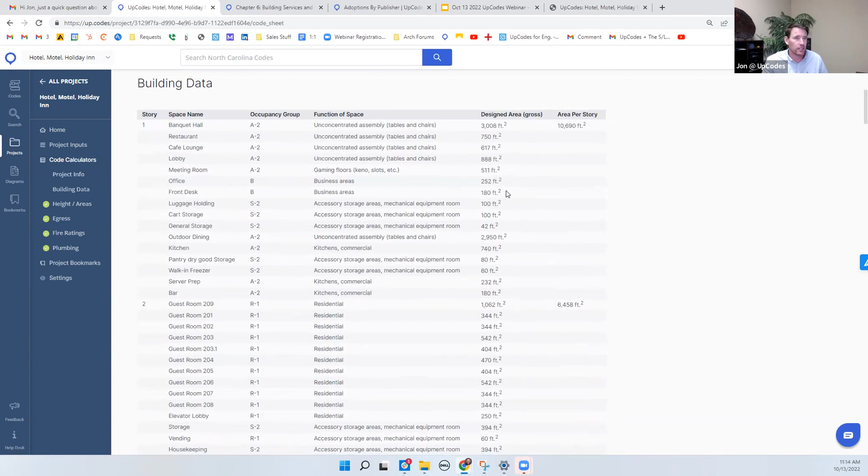Same idea here. I'm going to enter in information about my building, occupancy group, function of space, designed area, how many stories, sprinkler type of construction, whether or not I have fire separated occupancies. And based on that information that I punch in, the calculator is going to tell me whether or not my project is compliant.

So here I can see all my different, I've got a non-separated mixed occupancy here, so I've got one allowable area for each of my stories for all my different occupancy groups. And each time we do a calculation, we're going to walk you through the logic of the code we use to arrive at our conclusions.

So the first question will be, is this an unlimited area exemption building? No, looks like it doesn't meet the criteria. But if I want to check it out, here's those sections right there, and I could get a refresher on whether or not it's an unlimited area building.

Did we qualify for an area factor increase due to frontage? Well, we have 25% of the perimeter on the public way. So we'll go ahead and calculate the perimeter, the qualifying perimeter, based on distance to right-of-way lot lines. We'll get our equation here to get our factor increase, and then we'll increase the tabular area accordingly.

Again, each step along the way we're linking you to those sections of code saying, all right, here's the equation we use to get there. You know, maybe I want to bookmark it, say, all right, I use this to make sure I increased my area. Now it's added to my project.

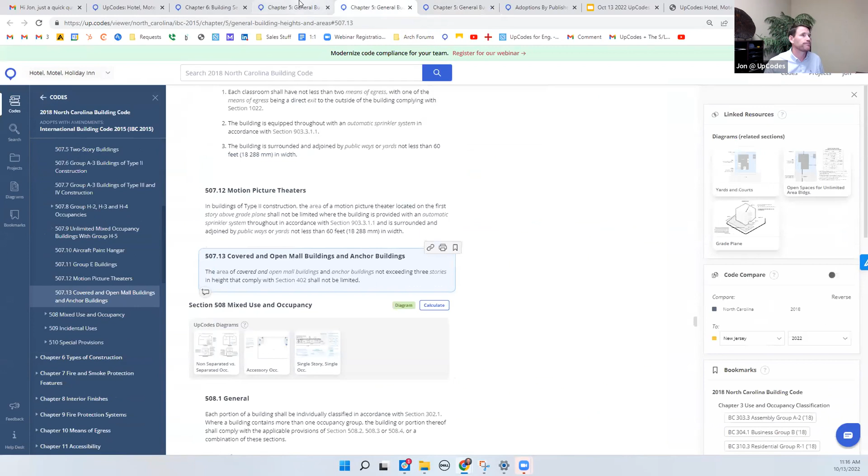So we'll go through and I can see, all right, my allowable area must be greater than or equal to the total designed area. Perfect. All right, I'm compliant.

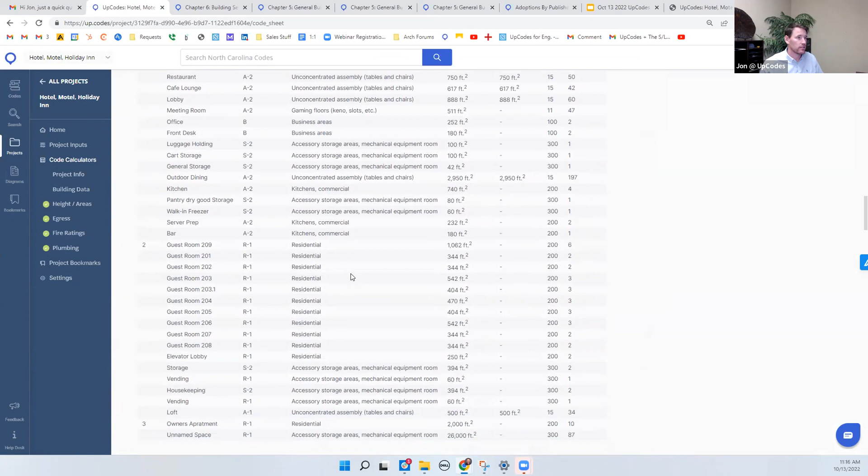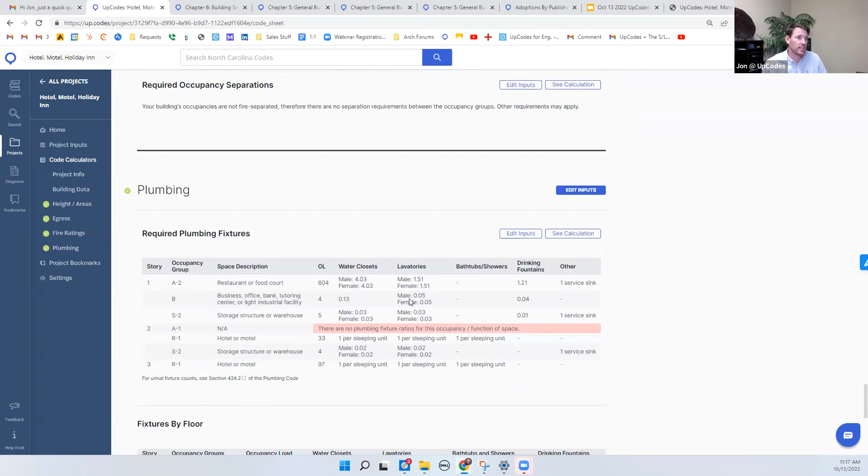So we'll go through these calculations in a very similar fashion for key areas here: building area, building height in feet, height in stories, egress and occupant loads. We'll calculate those occupant loads for you automatically based on occupancy, function of space, designed area. How many exits do we have per story? What's the travel distance, dead end corridor length? Fire ratings, area separations, corridor resistance ratings, and then what are our required plumbing fixture counts?

All these items can be exported now as a PDF or Excel. We'll go ahead and do Excel here. And now I've got a detailed code analysis sheet walking me through each step that we just did.

Now, if I share this Excel sheet with a building inspector, general contractor, anybody, all they have to do is click these links and it's going to take them onto the code, the free codes.

So now that I'm back in the code, I've got to do some additional research here. One thing I'll mention, since the codes are free and anybody can access them, each section of code here is individually hyperlinked.

So I can copy a link and maybe throw it in an email, responding to an RFI, giving clarifying code information. Anyone who clicks that link goes to UpCodes, sees the free codes. Sections that are referenced will pop up with definitions, and I can click links to reference sections and it'll take me right to those other items.

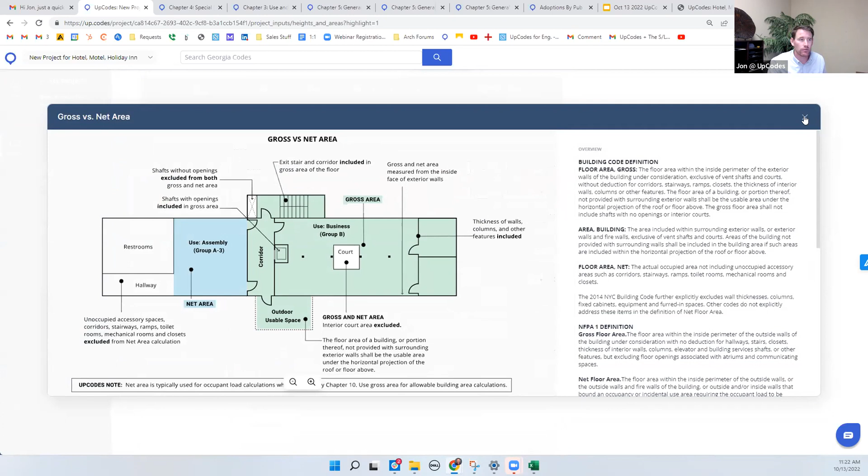I can go through, and once I enter in information about the building, maybe I want to change the construction type. Could we do a different sprinkler type? Is that available to us? Or maybe we do make it fire separated occupancies.

So this code calculator, as I'm translating into a new jurisdiction, is a great way to see — well, what if I change, what if I make these various amendments to my project? What are my code implications?

Now as I'm doing this research, obviously it's a pain to switch back and forth between different books or different spreadsheets and things like that.

One of the best parts and most widely utilized features on UpCodes Premium is the ability to search. So when I search a term, it's not really similar to Control F on a PDF — I'm not just doing a word search on one document.

I'm actually searching that term across every book in that jurisdiction. So all the codes we host, I'm now seeing all the hits — getting a lot of building code results, seeing results for this term in the fire code, sprinkler code, and the North Carolina electrical code.

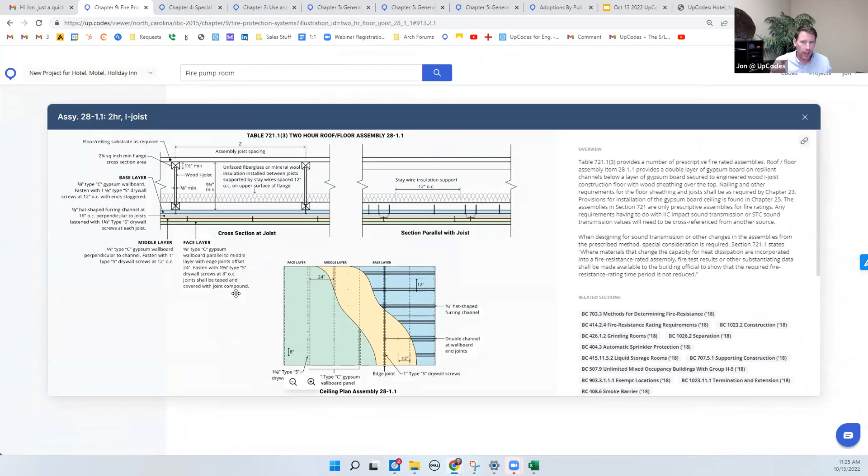So I've got my results here. I've got my fire pump room. I've got my answers to my questions. This particular section has some diagrams associated with it. If I click on one of these, and again, we saw these in the code calculator, helping us to understand what was required.

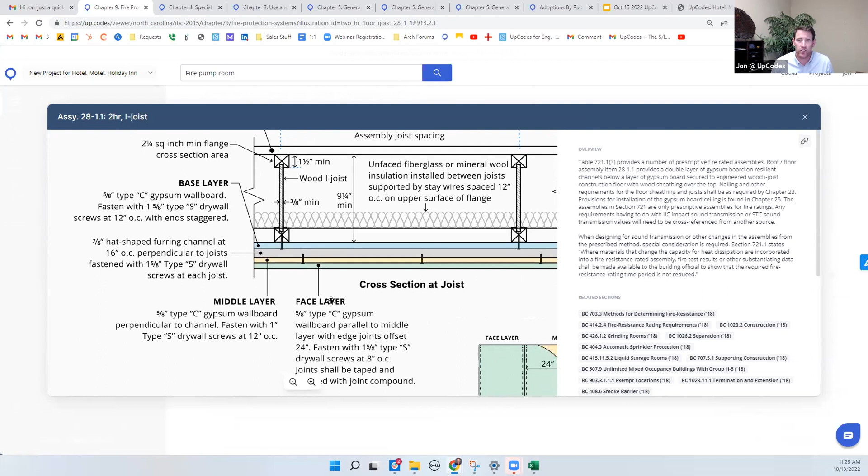Same idea here. What we've done is we've created a graphical display of what the code says in so many words, a visual unpacking of the codes. And we're not trying to make an interpretation of the code as much as just take the time to put the words of the code in an easy display, a visual.

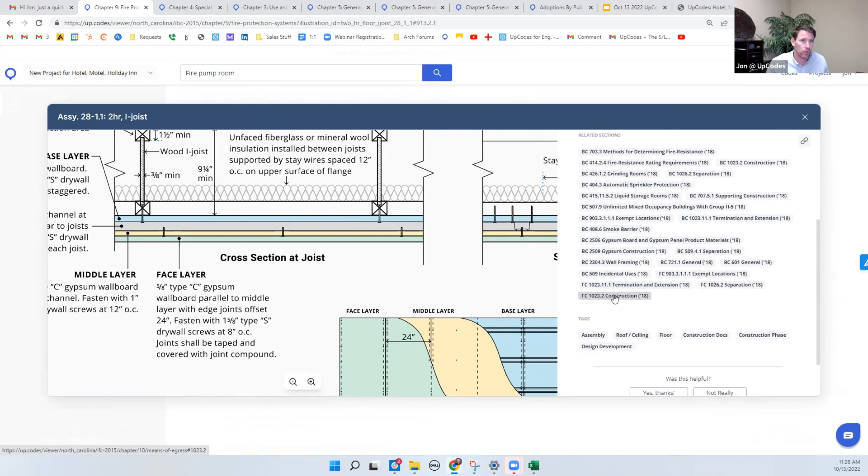This one's real nitty gritty. We were looking at a 2-hour roof floor assembly. I can see all the different components here. Got a plain English overview, and then links to other sections of code that talk about the same topic where this would be relevant. Again, I'm seeing sections here in the fire code, me following the tentacles of the code and getting deeper and deeper into the intention of the code and the rules of the jurisdiction.

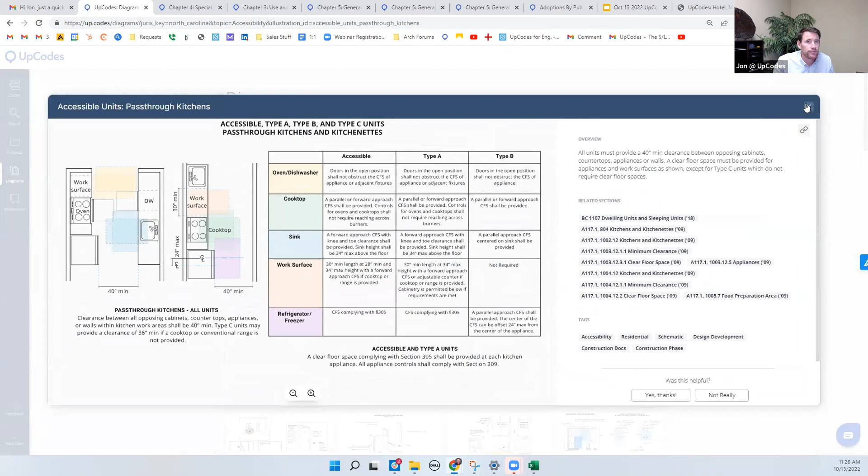We have about 700 of these. We're adding 20 to 30 a month. And you've got all sorts of different topics. I can say, well, let's just take a look at accessibility. All the way down to broad concepts like atriums, concrete steps.

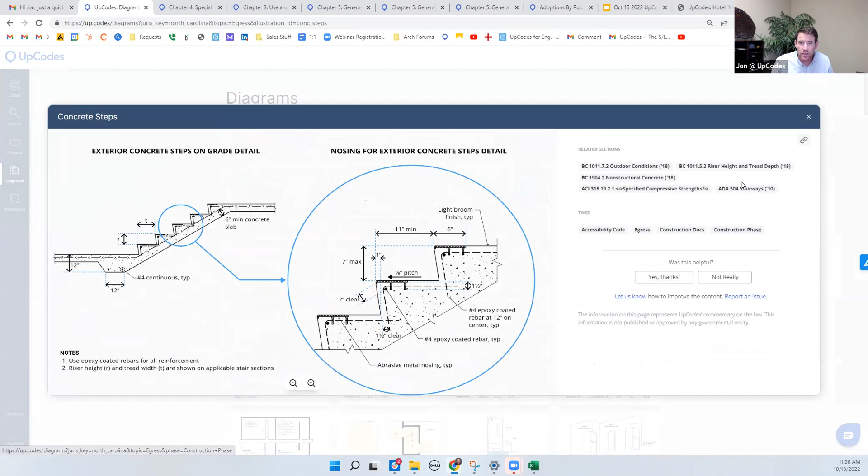Another thing that's great about these diagrams is that I can share them. So if I'm having a conversation with a building inspector and trying to make my case, or maybe I want to clarify something, I can post these directly into an email or document of some sort, and now I can share it. In fact, we got a report the other day, I'm sure this happens pretty regularly, folks answering an RFI using these diagrams. Hey, this is what I intended. Take a look at this image.

All right, we'll go back into the codes here. One of the things I can do with the codes, as I'm working in different jurisdictions and I want to understand what's changed, what changes when I go from North Carolina to South Carolina, is I can compare the codes side by side.

And what we'll do is we'll highlight for you anything that is different. So as I'm doing that project, moving items from North Carolina all the way down to Georgia for a similar project, it's going to highlight for me, well, these are the differences you need to keep an eye out for.

We can also do this within the same jurisdiction. So Connecticut, South Carolina, soon Massachusetts, New York City, California, all these jurisdictions that are updating their code, I can take a look at one version to the next. What's changed across this timeline?

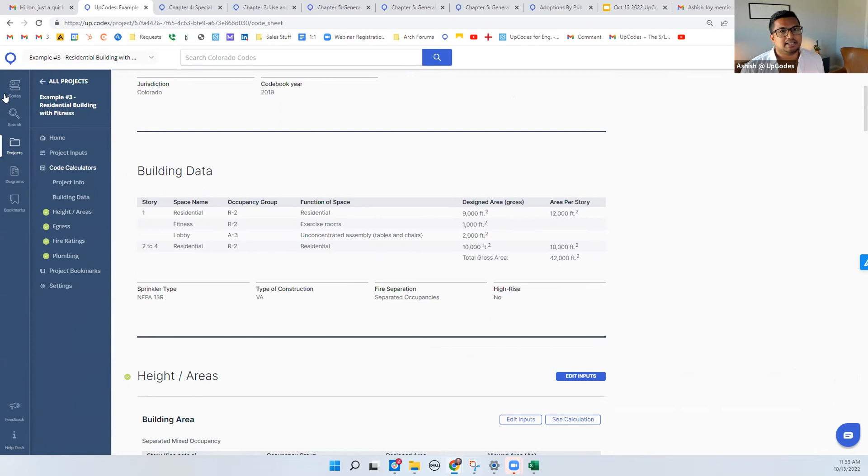Good question. Awesome. One of the questions that came in, I think would be relevant for the group is, could you just walk through a little bit more about code compare and the amendment styling, kind of show that feature and what the capabilities are?

Yeah, definitely. So I'm going to go into a jurisdiction here. We'll go into Connecticut, and I'm picking Connecticut because they just updated their code.

And we'll go Connecticut to Connecticut. So, working as an architect in Connecticut, I have a pretty firm understanding of the code that has been, but now that we have this new code adoption, what's going to be changed? What's required of me now?

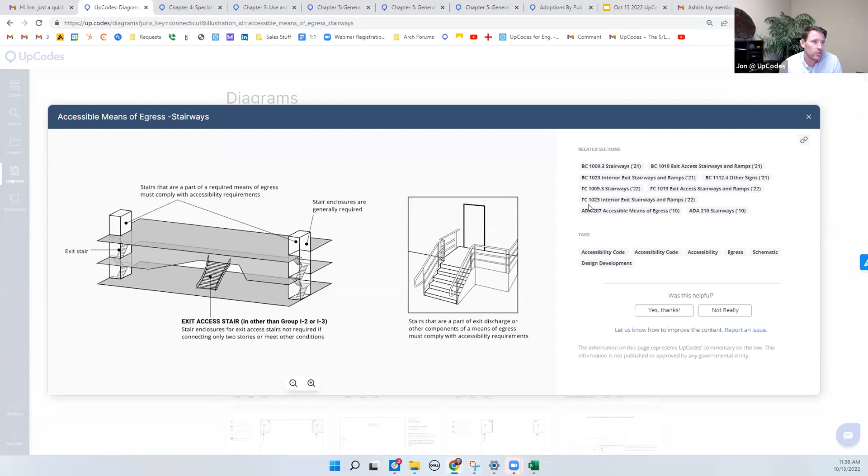And same thing with the diagrams. We definitely take requests, and the idea is the same: tell us what you want to see. We do our best to keep our finger on the pulse of what the industry needs. We're a lean team, so bandwidth is something we're always trying to expand, but it's easy for us to shift and focus on what's important to you guys. So do let us know what you want to see, and we can make those things happen.

Awesome. And this is just a question that I think a lot of folks have been wondering about: does a paid subscription include access to all the codes, or just specific jurisdictions?

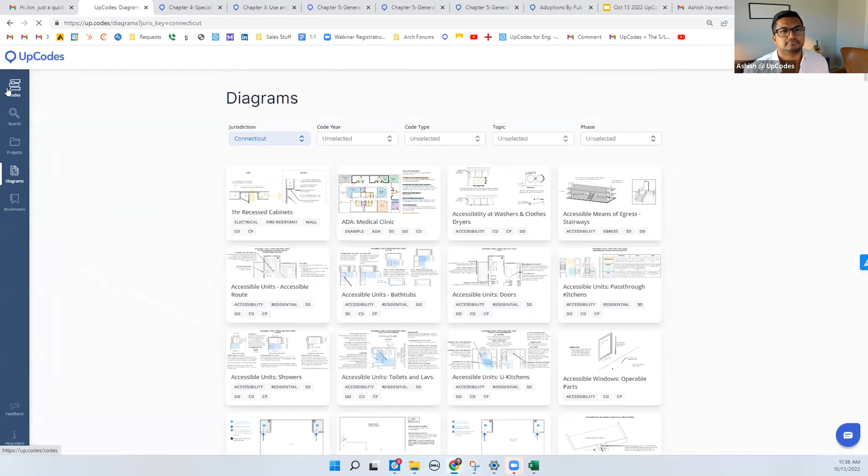Good question. All the codes, yeah, when you pay, all the codes that we have are available for anybody. Even if you don't pay, the free codes, the free versions are available for anybody. The free codes are the same, they have all the amendments, they're updated. You just don't have these kind of additional features that make using the code really easy - the searching, the code comparison, the diagrams, and then that project workflow, the calculator, the tagging, bookmarking, all that stuff. But yeah, when you pay for codes, you get all the codes.

Awesome. And there's frankly a lot of questions coming in, but I'm trying to sift through a few here. What's the best way for folks who aren't ready to pay yet, but they want their whole team to try it? What's the best way for them to get into UpCodes? Should they just start with the team trial, or what does that look like for them, Jon?

Yeah, great question. We have a 2-week free trial. Maybe if I could go incognito and go into UpCodes, show you - you're able to sign up pretty easily. We'll sign up here, you can create an account. Let's see some pricing. All right, try for 2 weeks free. So you can sign up, try it out.